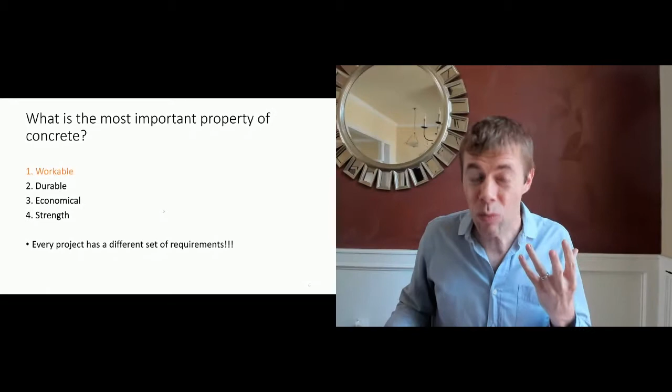But I'm going to take just a second and talk about the other items here: durability, economy, and strength. How do you design concrete mixtures? Is it as simple as rock, sand, cement, and water? It was a long time ago, but we've learned so much lately.

For durability, if you want durable concrete, you need to pay attention to your water to cement ratio, the SCMs that you're using, like fly ash, natural pozzolan, slag, and how much air content you have. If you want strength, it's about water to cement ratio and air.

Cement is not listed. I like cement, I'm a fan, but cement does not equal strength—water to cement ratio equals strength. Economy, that's where cement comes in: using local aggregates, minimizing admixture dosages, all of these things contribute to the cost of our concrete.

And these are things you can look at. But how do you design for workability? It seems impossible. Sometimes we're slip forming concrete, sometimes placing with a truck, sometimes pumping it, sometimes we have to finish it. How do we do this? It seems overwhelming, but every single mixture has a different set of requirements. I'm going to show you some of the secrets of concrete today, some ways to design for all these things and do it economically and get great concrete.

To do this, you can control your paste content, that's the water and the binder. You can control admixtures, and then you can control your aggregates. We're going to be focusing heavily on aggregates. Why? Well, aggregates make up about 75% of the volume of concrete, 75% rock and sand. That means if you ever hope to get control over the quality of your concrete, you better understand your aggregates and what they're all about.

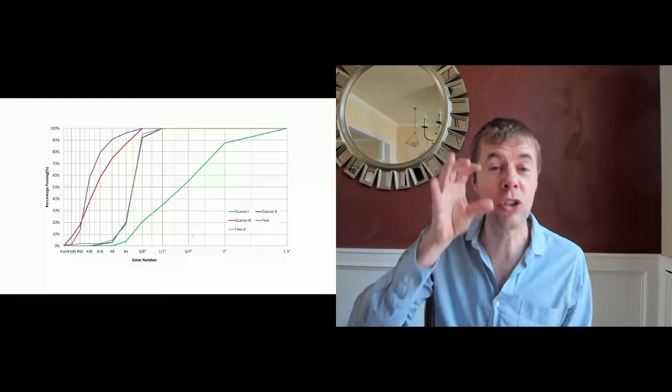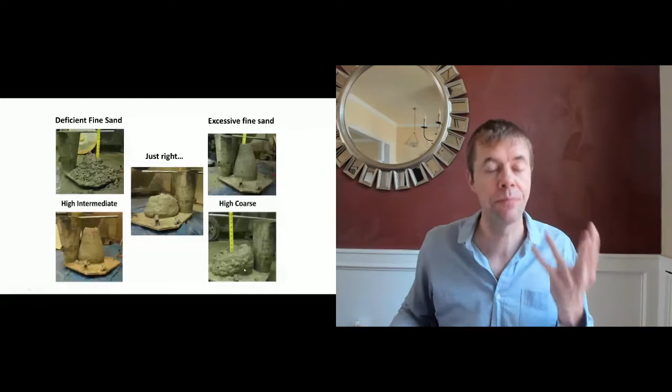If you get everything right, if you know what you're doing, it is going to be amazing. If you don't have the right amount of fine sand in your mix, oh my gosh, look at this. This is after the slump is pulled up, it falls apart. It's got a 5-inch slump, but it's not a 5-inch slump that I would want to pour with. If you have too much fine sand, it gets very, very stiff. Too much intermediate, it gets stiff. Too much coarse aggregate, you can see the rock trying to come out of the concrete. Again, that's not what we want, but if we know what we're doing, we can get it just right.

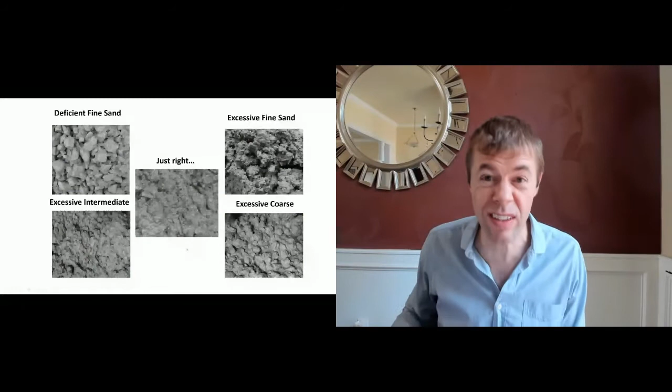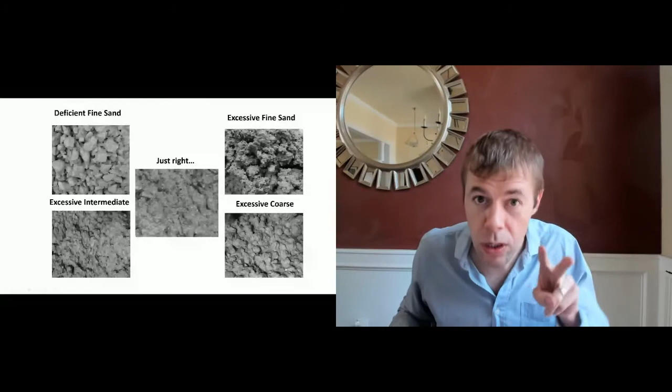Now, if you go to finish the concrete, that's where you try to make it smooth. Again, if you don't have enough fine sand, it looks like this, a bunch of paste covering rocks. That is not what we want. If you have too much fine sand, oh my gosh, it's hairy and yucky and so hard to finish. Too much coarse aggregate, you can see it kind of coming out of the mix. Too much intermediate, again, it's coming out of the mix, but if we get it just right, oh baby, it's amazing. I'm going to help you today get it just right every time with less cement, fly ash and water, less paste, and save you money and get better concrete.

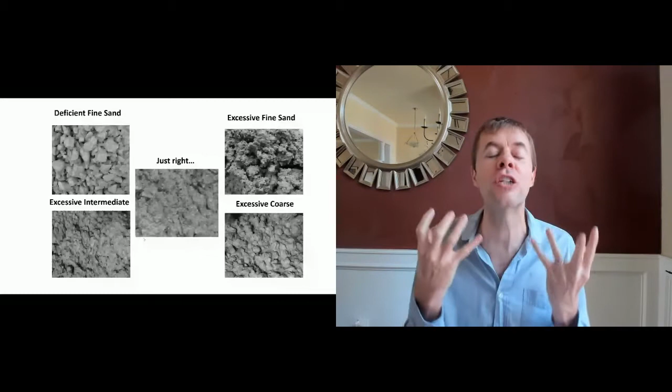So why would you do this? Well, we can reduce costs, improve our strength, improve our durability, improve our sustainability, and get control over our mixtures. Yes, this is awesome, right?

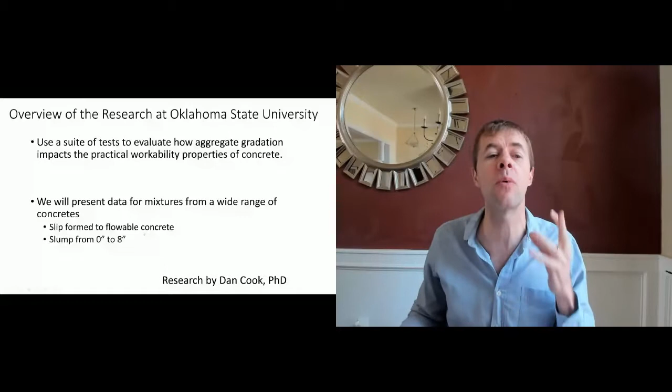So let's talk about this research we've done. At Oklahoma State University, we used a whole suite of tests. We looked at over 700 different concrete mixtures, 13 different coarse aggregates, a whole ton of sands. We looked from slip form paving all the way up to pumpable, flowable concrete, from slumps like 0 inches to slumps like 8 inches, like flowing water concrete. We looked at it all and summarized everything into a simple tool.

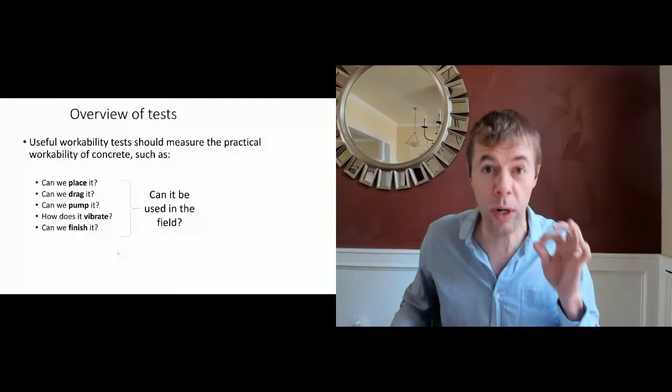Now, I'm going to use some tests to evaluate this. These tests are going to tell us about real workability: how do you place, drag, pump, vibrate, and finish? Everything I'm going to tell you about today is on this website, tarantulacurve.com. It's my gift to you. It's got Excel sheets, reports, videos, all kinds of stuff. Tarantulacurve.com. Oh yeah, it's all free.

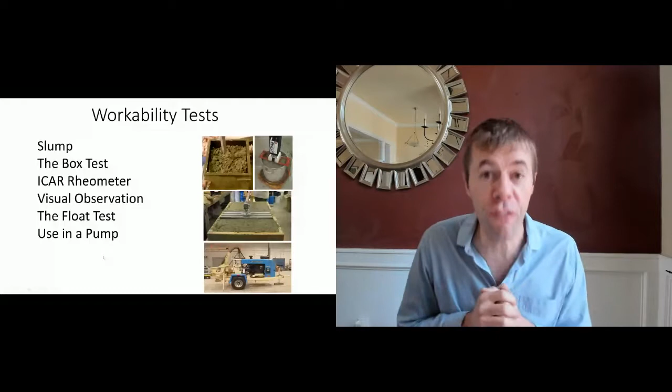We're going to look at all of these tests: slump, something called the box test, rheometers, visual test, a float test. We have our own pump, yes, our own pump, and we're going to look at pumping concrete as well. We'll start out with the float test. The float test tells you how you can finish the concrete.

What you do is place concrete in 3 foot by 2 foot by 3 inch deep forms. You fill them up and strike it off quickly. You don't saw it, you just strike it off to make it even. Then you create 3 holes, 1-inch diameter and 1-inch deep. We come over with a bull float, back and forth at a fixed angle over the surface, and measure how many passes it takes to close the 3 holes and make it smooth.

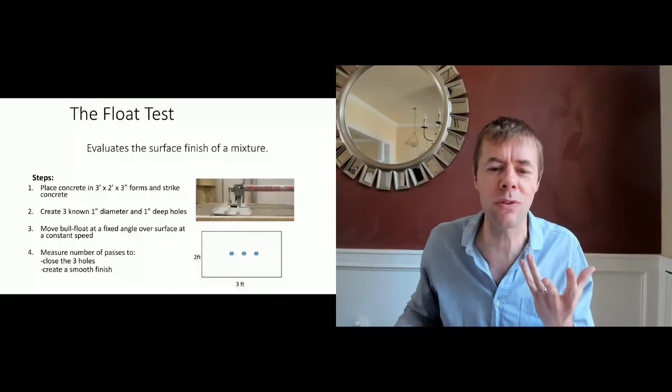Kind of confused? Well, let's look at some pictures. Here we go. Fill up the forms, strike it off. Template comes in, there you go. Put in this 1-inch hole.

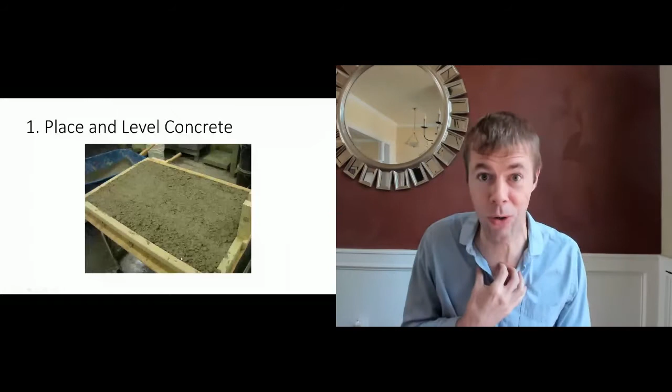Why would you do this? When I was a contractor in the past, many moons ago, sometimes when you strike the concrete, you pluck aggregate out. Whose job is it to fill those holes in? The finisher. So we want to know how easy it is to fill those holes as well as making a smooth surface.

Next, we went on and said, let's pump this concrete and see how it actually performed. And we are so blessed to have our own concrete pump at Oklahoma State University. I believe in doing things that are real, and so we can conceptualize stuff, but let's really pump it.

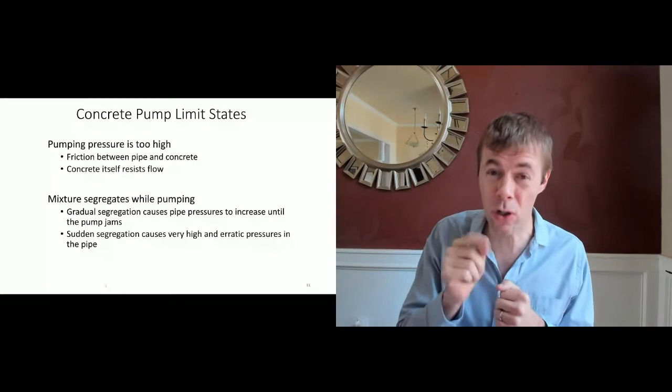So when you go to pump concrete, sometimes the pressures can just be too high. It's very, very hard to get the concrete to move within the pipe. Sometimes the concrete can start to segregate, I'll show you examples of that coming up. That's scary, dangerous, run for the hills, all right? And we should design our concrete mixtures so that doesn't happen, because that will hurt you big time when it comes to pumping.

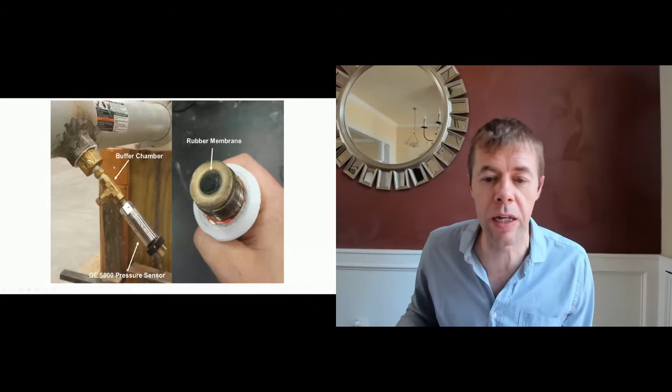And it looks something like this. They have a buffer chamber at the top, that's an oil-filled chamber, and we have this oil pressure measuring gauge at the back. We have this rubber membrane that's up here at the top, so you screw this in. We've drilled a hole here, welded a nut on the end, screw this in. So as it's pumping, it pushes down that membrane, which pushes the oil in the buffer chamber, which we can measure.

Hey, guess what? If you put the GE pressure sensor right in the concrete, it lasts exactly 30 seconds. I've done it twice because I wasn't smart enough the first time to figure out that it broke every time.

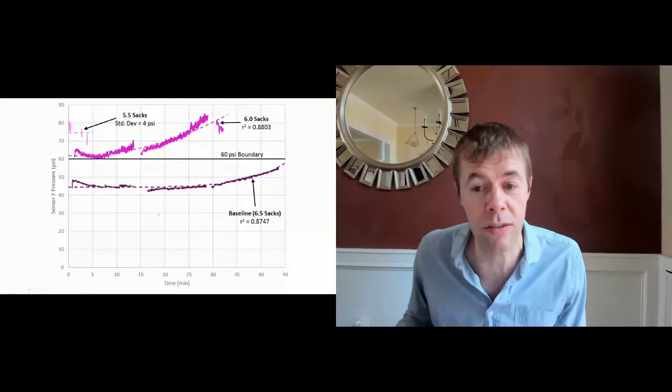How does sand impact pumping? We can quantify it. We use something called fine sand. And actually, as your fine sand content goes up, I'll teach you what that is coming up, it gets easier to pump. Oh, baby, it's awesome.

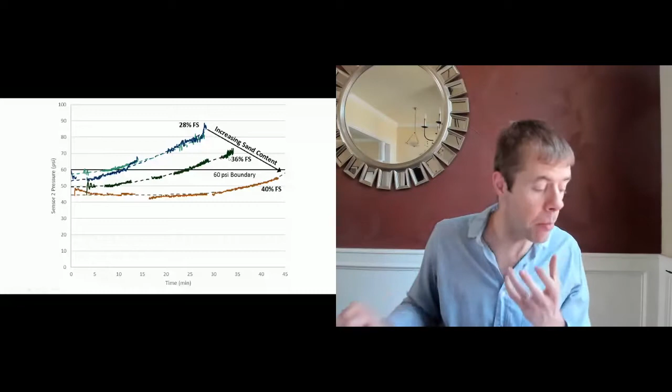Paving is a unique beast because you want the concrete to be workable, but not too workable. You want it workable enough that the vibrators can consolidate it, but not so workable that it doesn't hold an edge. So you need this boundary - it needs to be stiff enough, cohesive enough to hold together, but not too flowable. So how do you figure that out?

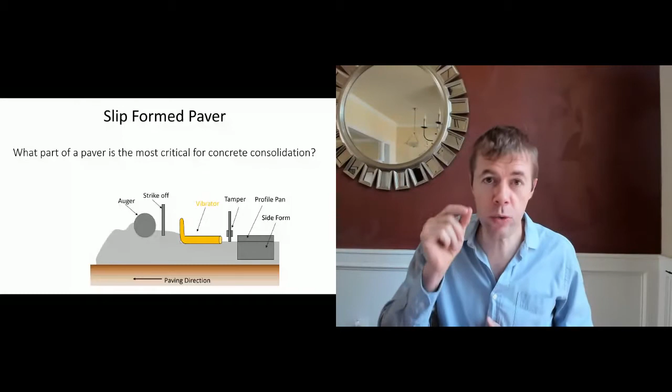Well, we started to think about how does a paver work? How does a paver really consolidate the concrete? It's all about the vibrator - how does that concrete respond to the vibration? So we said, how could we simulate that? We wanted a simple test that could measure this response to vibration, measure this filling ability of the grout, and also the ability of the slip form concrete to hold an edge, to be cohesive. This is the two edges I talked about before. And the slump test, although it's totally amazing for certain things, is not amazing for this.

So we came up with a different test. It's called the box test. I'm thankful to say that the box test is now an AASHTO standard - go check it out if you want to. It is a 12-inch by 12-inch by 12-inch box held together by these very expensive pipe clamps. $20 from Lowe's - unless you're in Hawaii. When I gave this talk there, it was $40, because I went and checked. $40 in Hawaii, $20 in Oklahoma, pipe clamps to hold it together.

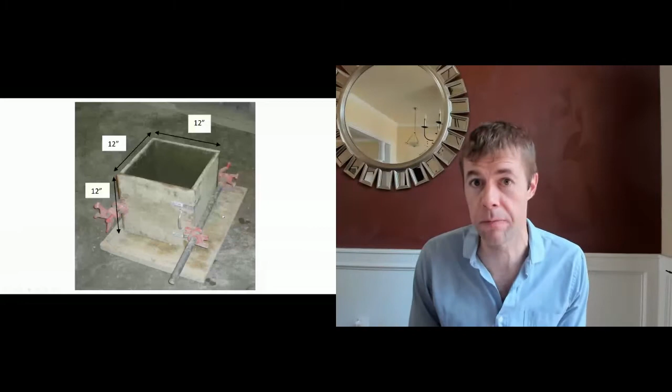Now, this box is two L's, okay? So it's an open top and an open bottom. We're going to fill that box full of 9.5 inches of unconsolidated concrete. We're going to take a 1-inch Stinger vibrator, not a paving vibrator, a 1-inch Stinger vibrator, and turn it on, take it down for a 3 count, take it out for a 3 count, and then immediately take the pipe clamps off, take the edges of the box off, and look. What's it look like? Does it have honeycombing? Does it have any edge slumping? Because those are the two boundaries. If it's got honeycombing, that means it didn't respond to the vibration. If it's got edge slumping, that means it's not cohesive enough to hold together.

We did tons and tons of tests with this, tons of field validation with this. And here's how it looks - there's the concrete, there's the vibrator, there's where it goes in. You can see it's consolidated it - the sphere of influence of the vibrator has gone out and consolidated the concrete. The size of the vibrator and the size of the concrete is actually decided based on what a paver, the amount of energy a paver would put into a typical cubic foot of concrete going at a typical speed.

But after you take it off, you get this - a beautiful concrete brownie. Isn't that amazing, unbelievable? What I love most about this concrete brownie is that there are no huge honeycombing surface voids, because we use a visual ranking scale between 1 to 4, kind of similar to the float test. We don't want 4, we don't want 3. We are plenty happy with 2. And 1 is great, but we're not building Swiss watches - we're building concrete pavements here. So 2 is just great, 10 to 30% overall surface voids. We also look at edge slumping.

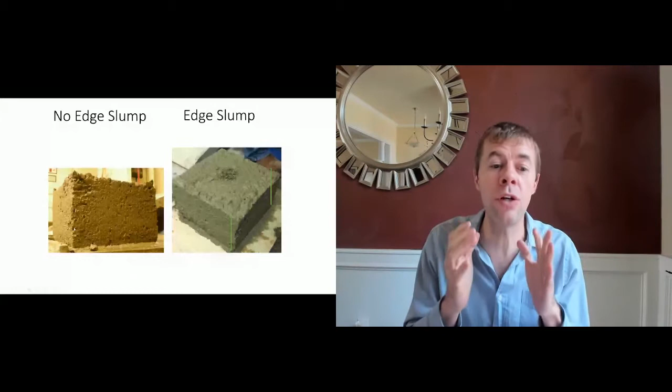So in summary, the box test examines this window of workability. This is helpful when you're designing mixes, when you're trial batching, when you're troubleshooting. It's like having a miniature paver.

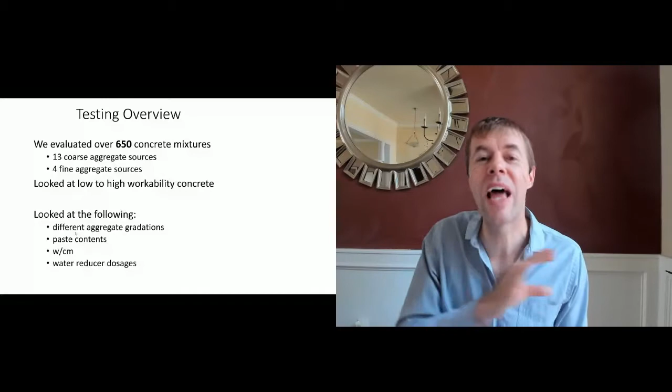We looked at over 650, close to 700 mixtures, tons of different materials, low workability, high workability, different water cement ratios, different paste contents, different water reducers, different admixtures, over $1 million in research, ladies and gentlemen. And we summarized everything you need to know on this next page.

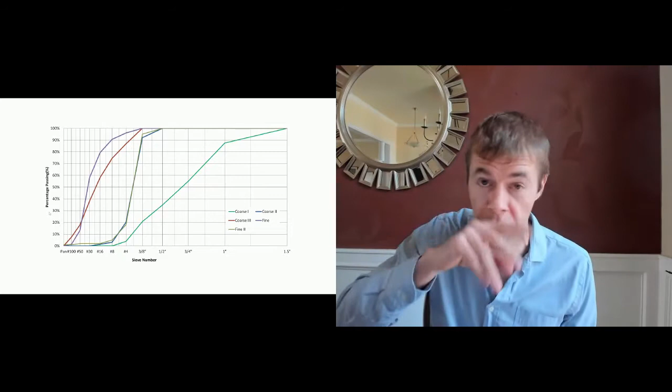I realize yours are going to look different than mine. That's fine, you use your stuff. And then what you do is based on the amount of coarse, intermediate, and sand you use, you get this thing called the combined gradation. And that is what goes in the tarantula curve. Let me show you what I'm talking about.

Let's step through every one of these boundaries, and I'll try to prove to you why it's important. So here's the plan. We're going to use workability to look at how gradation impacts our performance. So as we change gradation, we can directly see how this impacted each one of these tests. We use all of these tests to give them a ranking, and we're going to try to find limits, the oh-no limits, right, when bad things start to happen.

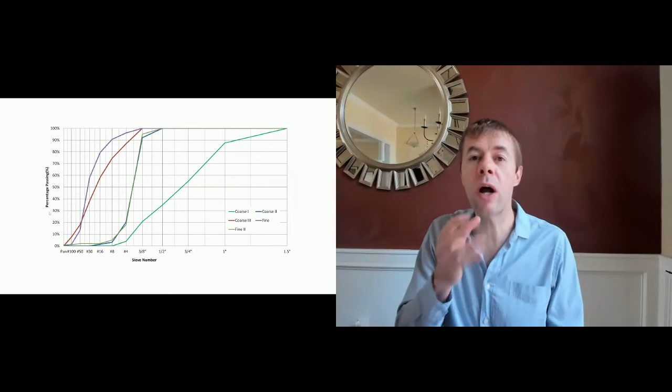So if I go down in one place, or decreasing my 57 stone, if you're a concrete person, then I'm going to increase my number 8 or my intermediate material. And I have a poor workability at the beginning, right? So if I do this a little bit, it gets better, and then it gets good, and it's good, and then it's still good, and oh, it's not as good, and then it's poor again. And it's still poor. This is important.

This is critical. I know you've seen this in your life. Too much of something is bad. Too little of something is bad. The right amount, that's what we're looking for. Concrete's the same way. If you have too much of any one sieve size, you're going to have poor performance. If you have too little, as we start to get poor down here, we get too much of a sieve size over here. And this teeter-totter, this kind of good in the middle, too high, too low, going to be a problem. You're going to see this trend over and over and over again.

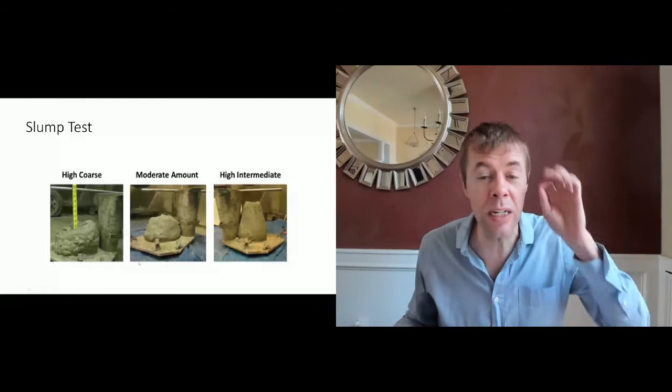Here's what happened in the slump. Moderate amount, right in the middle, everything was great. Too much intermediate, it was too stiff. Too much coarse, it looks something like this.

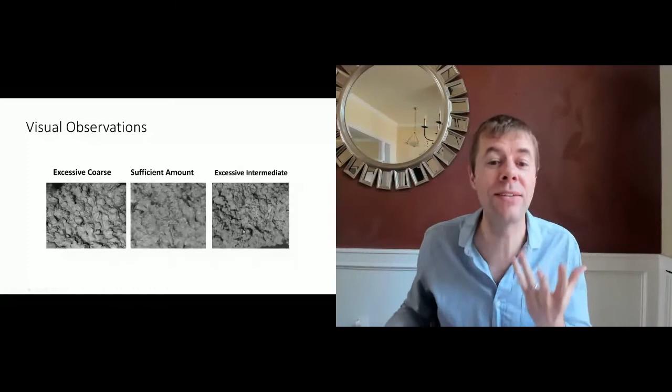Let's talk about sand for a second. Now, we usually use a term called the fineness modulus, or the FM. It was developed by Duff Abrams, one of my concrete heroes.

If he's not your concrete hero, something's wrong with you. He's amazing. In 1918, he came up with this fineness modulus, and it takes an entire sand gradation curve and expresses it as a single number. Now, can you ever express anything complicated by a single number? As engineers, we try heavily, and I think we fail over and over again, especially when things get more complex. Ladies and gentlemen, if you're dealing with a manufactured or blended sand, fineness modulus means nothing. And everything you've been taught in the textbooks means nothing.

We just completed a huge study on blended sands. I'll tell you some of the high points at the end of this, so start paying attention. What am I talking about?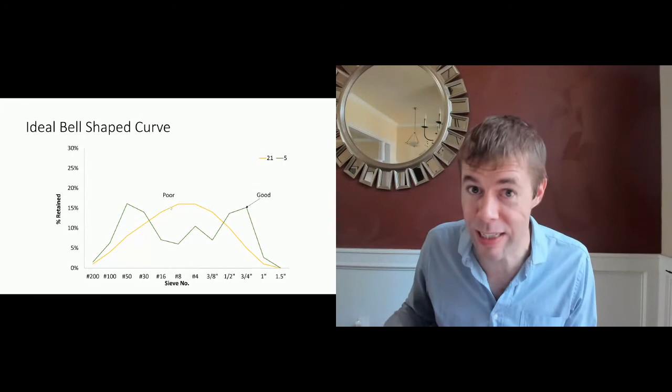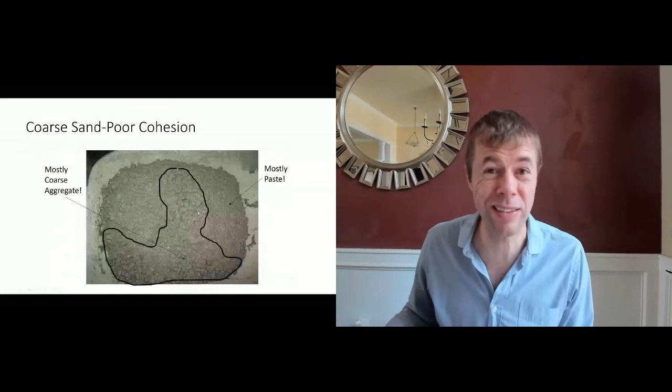If you have too little, you can get poor cohesion. What am I talking about? All the coarse aggregate is here, very, very little - mainly paste out here. That's not good, that's not what we want. That's called segregation - having too little of these materials can also cause segregation. So again, we set certain limits, and the tarantula curve helps you with those limits coming up. So how do I check this?

With the coarse aggregate, that was super easy - did you go above or below this boundary? But with coarse sand, you still have the boundary, but now you do another calculation. It's not hard: how much number 8, number 16, number 30 do you have? Add it up - 8, 16, and 30. If that number is greater than 15%, you're good. That was 25.6, so it goes up in our oval. If it's greater than 15%, we're good.

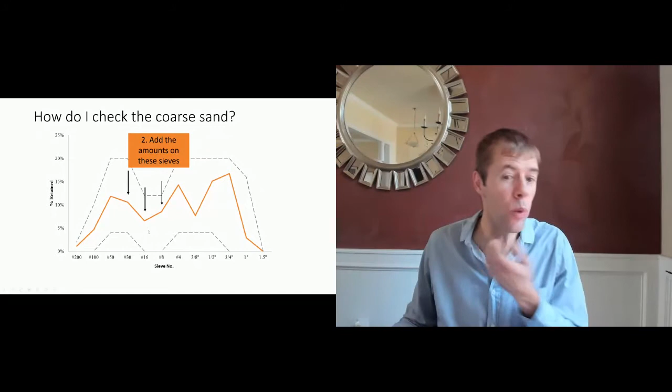Let's go into fine sand - the smaller material from number 30 and below. We're going to do the same type of thing I've been showing you. Here is when we have too much sand - this is unusable. We push this down and move these up, reducing sand and increasing the amount of intermediate and coarse aggregate. Look at that - it's poor, it's good, it's still good, then it gets moderate, then poor, then unusable.

The same things are happening. Too much sand, it's like a hairy mass. Not enough sand, it's like you've got paste surrounding rock. Right in the middle, it's great. All of these have the same cement content, the same fly ash, the same water - all of them are the same. The only difference is the size distribution. That's the only thing.

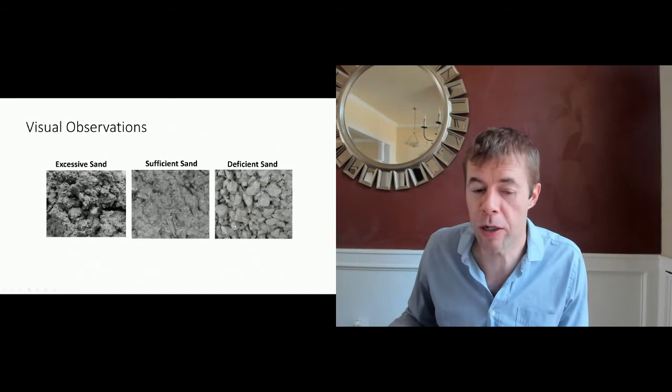Here we go: excessive sand, sufficient sand, deficient sand - you can see it with your own eyes. Here's the segregation I told you about before - this is really extreme segregation, a lot of coarse, a lot of paste over here. We found these ranges of sand that as long as you're between about 25 and 40% sand, you were good, everything was great. As soon as you get too little, things were a problem, and too much, things were a problem.

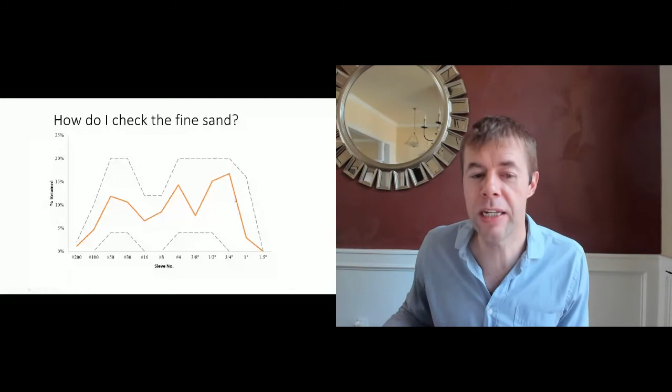So how do I check fine sand? Kind of similar to the mid-range sand or coarse sand. Is it within the boundary? That's question number 1. Number 2, how much number 30, 50, 100, and 200 do I have in my mix? I total those up and get 28%. Is that right? Well, that's going to depend - I go up and look inside the box to see what I need.

If I'm using a flowable concrete, a pumped concrete, something I'm going to finish, something with more than 3 inches of slump, then I want a fine sand content between 25 and 40%. If I'm doing slip forming, I want between 24 and 34%. Slip forming needs more cohesion, so you don't have as much fine sand. Flowable needs more finishability, which is why it would like to have more of that fine sand inside it, so we can better understand and quantify this stuff.

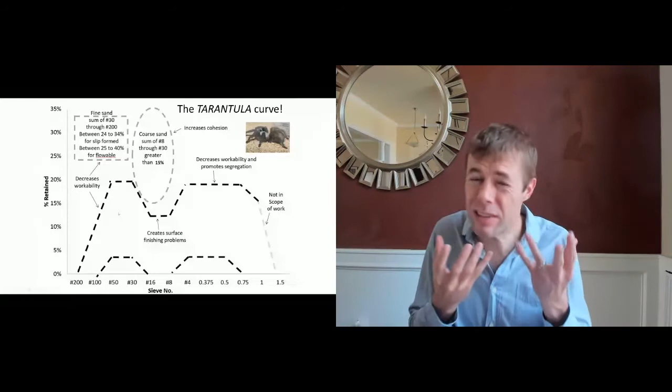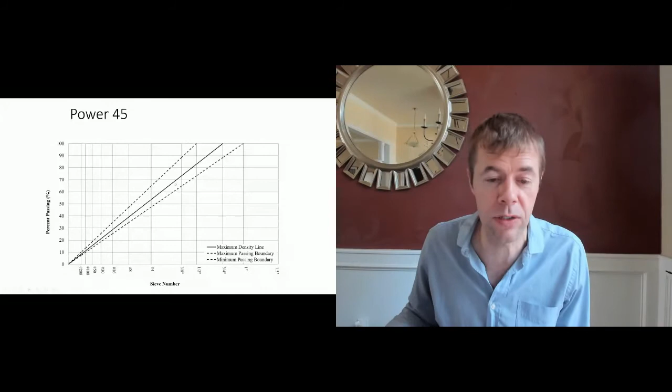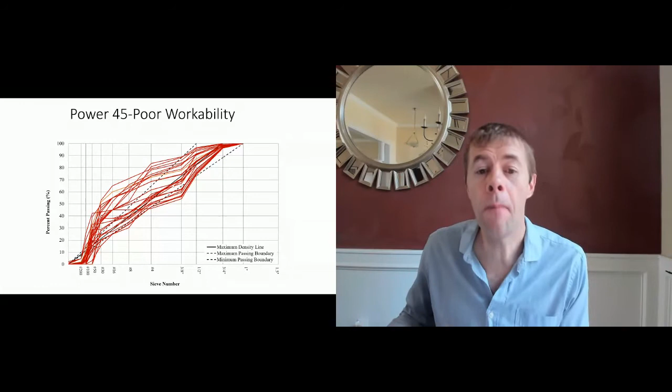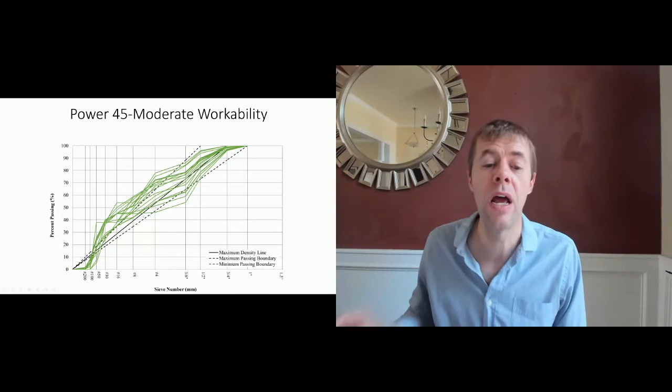The Power 45 is cool, it shows some good stuff. I think it's theoretically neat, but it's complicated and doesn't always seem to work. The tarantula curve makes this a lot easier, and also pays attention to your fine and coarse sand content. Then there's the coarseness factor, or the Shilstone chart, where you plot the workability factor over here, which has to do with the amount of sand and cement you have, and the coarseness factor down here, which has to do with the amount of coarse and intermediate aggregate you have.

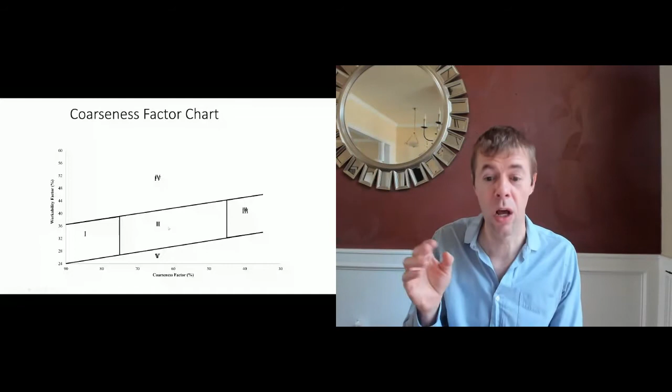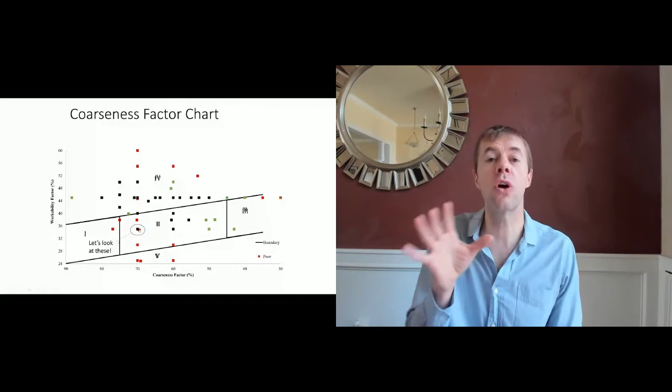Here's why: the Shilstone chart is cool, it knew lots of neat stuff, but there's things it missed. This has a poor workability, this has a good workability, and it straight up missed it because the Shilstone chart doesn't tell you how much can be on each sieve. It just tells you in general coarse versus intermediate.

So in summary, the Power 45 and the coarseness factor chart were a great start, but they're not complete. This tarantula curve is simple. States are using it. I get emails every day from people, I get little videos from people showing me using the box test and doing this stuff. People are loving it, giving us great feedback.

But here's a real case study. Minnesota DOT wanted to optimize grade their concrete. This is 1996 and 1998. They didn't know anything, they'd never done it before, and they just tried. They said, hey, let's try to do it, let's use some of the tools, the Power 45, the Shilstone, the stuff I showed you before.

This is showing the tarantula curve outline, and this is showing their gradations. Not very many of them were within the tarantula curve, and the performance between 1996 and 1998 for their pavements was pretty hideous, pretty horrible. By 2009, because they started to pay an incentive and encourage people, 87% of their mixtures fell within the boundaries of the tarantula curve. By 2010, 98% of their mixtures fell within the boundaries.

Now, ladies and gentlemen, why this is so interesting and cool is in 2010, the tarantula curve didn't exist. We hadn't even started the research in 2010. These contractors are not stupid people, they're not going to use what doesn't work. They are going to use what does work, especially if they're paid an incentive, especially if you give them a reason to try. They're going to try and try hard.

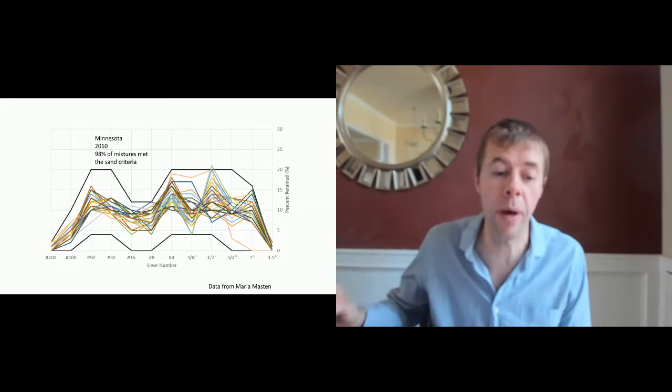If you look at the percentage of mixtures within the tarantula, it goes up and up and up. And if you look at the smoothness of their pavements, as more mixtures fell within the tarantula curve, their smoothness, their IRIs, got better and better. So Minnesota contractors are having good success with this, doing it through trial and error, with no knowledge of the tarantula curve. As more mixtures entered the tarantula, smoothness got better. I got similar data for Iowa and Michigan, if you don't believe it.

So how in the world do I get a mixture inside the tarantula curve? Well, usually you need three different aggregates. Why? Because you need levers. If your coarse is out, you pull the other two levers to get you back in. If you don't understand what I'm talking about, I'll show you coming up in some images. But this is what it's all about, having options.

So for example, if I have too much coarse here and I have a poor mixture, I'm going to decrease my coarse and increase my intermediate. Now, does it have to be intermediate? No, I could decrease or increase my sand if that's what I need to do to make it work. It's whatever you need to make it work.

Do my curves have to fit within the tarantula? No, of course not. But you're going to need more paste. If you're ever using 700 pounds per cubic yard of concrete, you might want to look at your gradations when it comes to paving. This usually means more cost, greater risk for cracking, things everyone wants to avoid.

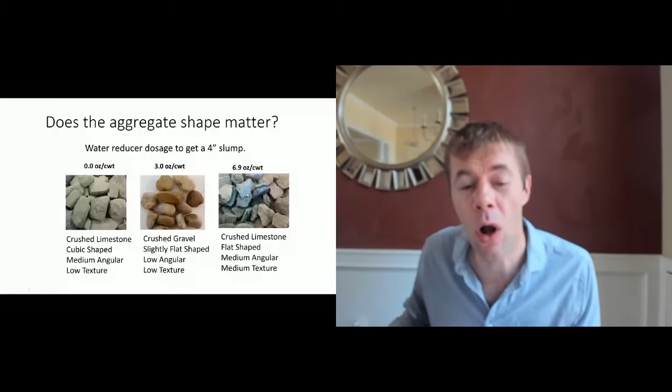Do aggregate shapes matter? Yes, they do, and I'll tell you how. This one and this one were all mixed at the exact same gradation, but used very different water reducer dosages to get a certain amount of slump. This one needed none, this one needed 6.9. Why? See how these are flat, see how these are elongated? That's not your friend.

How do you measure this? Well, we have a test out there, the ASTM D4791 test. It measures the long dimension to the short dimension. It looks something like this.

Your minimum dimension to your long dimension ratio - if less than 15% of your particles meet this 1:3 ratio, that's what you want. Do my aggregates have to meet this? No, but again, you're going to need more paste to make this work.

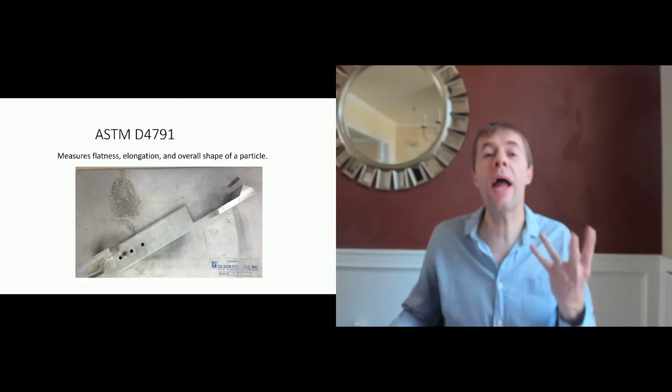Does the tarantula curve work with man sand? I know you've got some of that blended sand. Of course it does. But there's a tweak though, and I wish I had more time to explain this. Maybe you can reach out to me and we can talk more about it.

You're going to change these limits by 2%, up by 2% if you have man sand. It's that simple, ladies and gentlemen. How in the world can it be that simple? Invite me back, and I would love to tell you how simple it is.

Why in the world would you do this? Because you can simultaneously reduce your cost, improve your strength, improve your durability, improve your sustainability, and get control over your concrete. That's where we all want to be. When everyone's mixtures are workable, everyone's lives improve. I believe that. This means it's going to be easier to place, drag, consolidate, finish, pump.

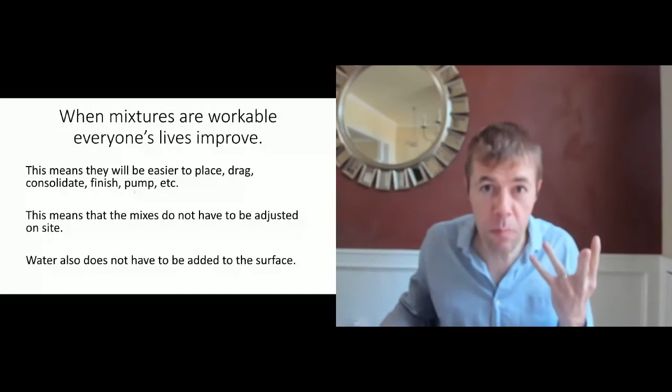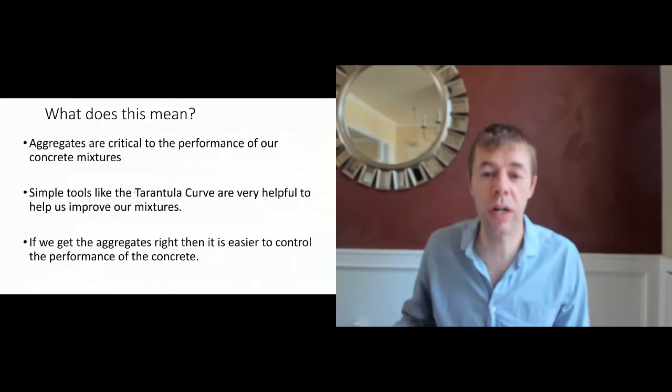This means you don't have to adjust mixes on site. This means you don't have to add water to the surface or water to the truck as much, right? So this means aggregates are critical to the performance of your concrete mixtures. Simple tools like the tarantula curve are helpful to improve our mixtures. And if we get the aggregates right, it is easier to control the performance of our concrete. Getting your aggregate gradation right is the very first and most important step to success when it comes to a concrete mixture. And reducing paste content equals many, many benefits for your concrete.